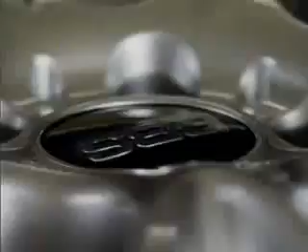They're like shining rings, sparkling jewels, the ultimate expression of an automobile. Emotions and passions focus on them. Their light alloy metal is seductive. Their gleaming brilliance radiates sheer power. Wheels are the finest feature of any car. BBS, driving in its finest form.

This expressive power has always been closely associated with motorsports. Look at a winning vehicle and you're looking at BBS wheels. All over the world, in different racing series and successful teams. Pole position in light alloy construction, world champions in series quality, world record holders in heavy-duty stability. It was the racing fever at the world's leading motorsports events that produced the BBS myth and developed the BBS brand.

BBS wheels are elegant. These giants of the sports world are naturally discreet. They don't need to prove a thing. It's this confident sense of style that car drivers and car makers appreciate in equal measure. Form following function, and lines based on mathematical curves that create the ideal line in every curve. Dynamism defines the appearance. That's the distinctive feature of BBS.

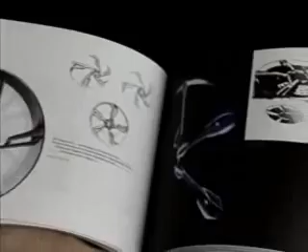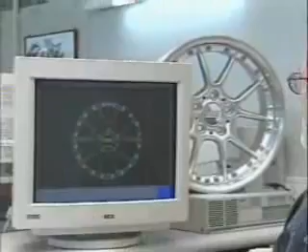Cooperation with highly regarded designers keeps the formal language fresh and satisfies customer-specific brand worlds. Within this creative network, maximum customer orientation and flexibility have proven themselves again and again. Development is teamwork on the customer's premises, ideally in a standardized software environment with problem-free interfaces for the transfer of data models and simulations. Achievements are passed on, results are maximized.

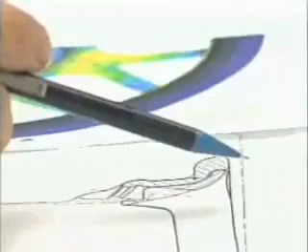At BBS, development primarily involves innovation, and that's why we don't need to keep on reinventing the wheel. Special development modules enable fast results within the cost targets. Simulations allow us to reduce the number of potential solutions down to a small number of finalists. But it's still the test benches that provide the ultimate results.

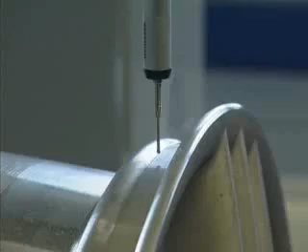BBS has a comprehensive testing area with all the testing equipment used to verify the usual standards and specifications. At the same time, our in-house requirements are far beyond those of the legislative and testing companies. After all, at BBS, every wheel has to be able to withstand the extreme conditions of motorsports.

Various factors have to be coordinated with one another, such as light alloy construction and stability, aerodynamics and brake cooling, or design parameters and production optimization. Add the highest processing safety and you have a high-grade quality product.

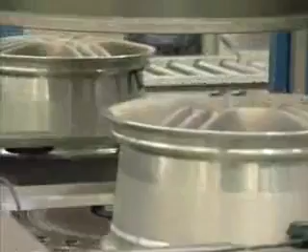BBS has several production plants worldwide, all working to the same high standards. All car manufacturer certification guidelines are fulfilled. Our ultra-modern process-oriented and self-organizing structures reflect the state-of-the-art in plant technology.

The hall layout enables different plant levels, tool changes without production interruptions, parallel production of large and small batches, and redundancies in process-critical applications. Reallocation of capacity on the fly takes place in all our production plants worldwide.

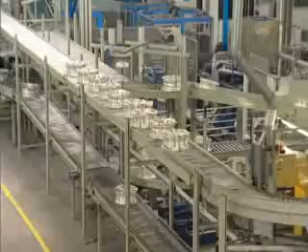The production process begins with fully automatic low-pressure casting machines. The alloys are standardized, but the decisive difference is made by the timing of the processing steps and also the details of our tool construction, like temperature control, for instance.

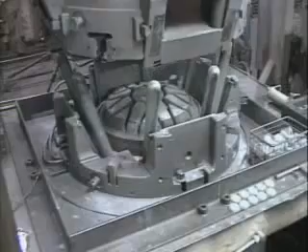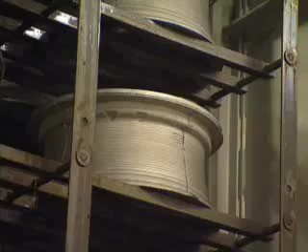During the several hours of heat treatment, the material properties of the future wheel are precisely adjusted. After the solution treatment furnace, the aluminum structure has the required structure and elasticity for operation.

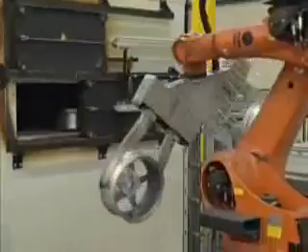In another furnace, the wheel is reheated to the ideal temperature of 300 to 350 degrees. Then it is mounted concentrically on a negative mold. In a uniaxial movement and under high contact pressure, a continually lubricated roller head creates a rotational profile. It's done on the principle of the potter's wheel.

The heated metal is simultaneously molded and compressed. This results in more stability, combined with less use of material and less overall weight. BBS is considered the pioneer of this process. It's known as flow forming.

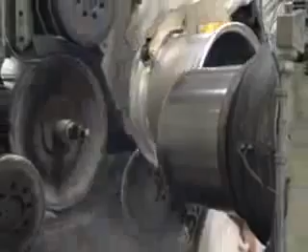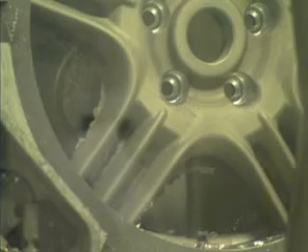After casting, the sprues and burrs are removed in a fully automatic CNC machining station. Bolt holes, the valve hole, and the center bore are also drilled. This is now done dry at BBS. Liquids, which are normally essential for cooling and lubrication during these machining processes, are not added. The overburden is fed straight back to the melting furnace.

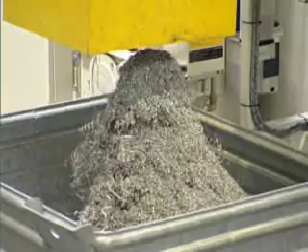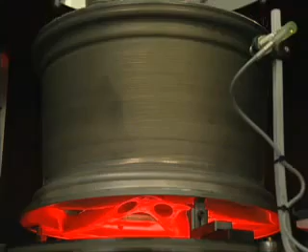BBS specializes in this dry machining process, which has won several awards. The entire station is hermetically sealed in order to prevent any emission of aluminum dust. Infrared sensors guarantee the precision of all contours. With special wheels, the deburring process is still done manually. Largely automated conveyor technology guarantees steady material flow between the machining stations.

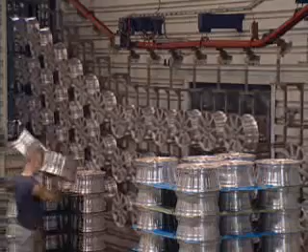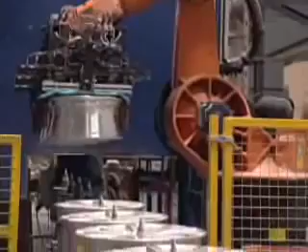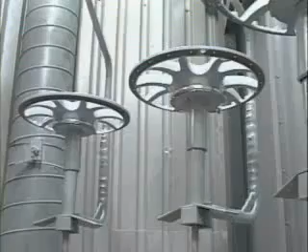With its chrome-free finishing process, BBS has introduced an innovation that has set new standards worldwide. This process has won us numerous prizes, including the Entrepreneur Award for medium-sized businesses. Melting the lacquer by means of powder coating leads to several advantages. The coating is thicker and, unlike horizontal coating, far more even at all locations in the wheel geometry.

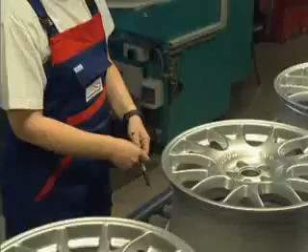The double-thick layer of varnish sharply improves scratch resistance and anti-corrosion properties. One reason why the use of BBS wheels in winter conditions is unrestricted.

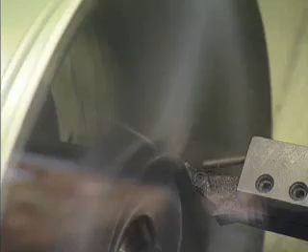Diamond-cut BBS wheels are especially popular. They owe their deep and brilliant luster to a special technique. After application of the coating, it and the aluminum surface are partially polished on automatic lathes using a diamond-tipped tool. This creates a highly attractive alternating pattern between polished and unpolished surfaces.

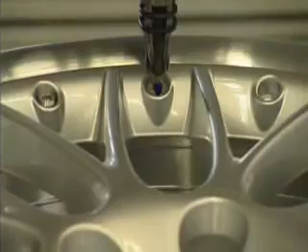High-quality modular wheels are an integral feature of the BBS brand. Forged spokes and flow-formed rims can, for instance, be combined to form an ultralight wheel. The sections are connected by titanium fasteners.

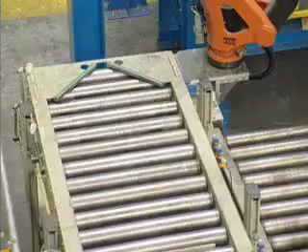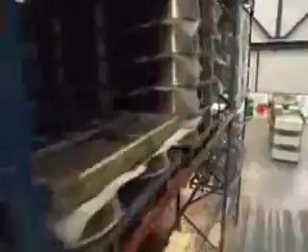OEM demands delivery to car makers, just in time and just in sequence. On the other hand, the aftermarket is characterized by seasonal cycles and fluctuations in demand. These extremely different requirements have to be satisfied by production and logistic planning, from mass production of millions of wheels to a single prototype wheel in motorsports.

With the GTI wheel of the VW Golf 5, an entirely new process of hollow space wheel construction has reached series production. The hollow outer shoulder is created via flow forming without the core being lost or enclosed, a world first in automotive engineering, a breakthrough in cost effectiveness. Hollow space wheel constructions can be made viable in the volume segment.

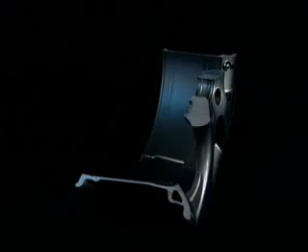The inner shoulder can be formed in just the same way, with considerable benefits with regard to costs, stability, and mass moment of inertia. Combined with the slide casting process for the spokes, complete wheels with airtight hollow spaces can be visualized in a self-contained production process. This is Air Inside technology from BBS.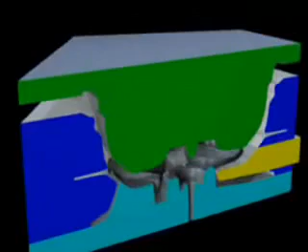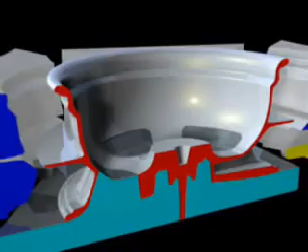Air Inside technology is a good way of demonstrating how the strengths of BBS work together. Restless pioneering spirit, operational excellence, complete command of processes, intensive cooperation with customers, and systematic market orientation all combine here to create a key technology in chassis construction. Less unsprung masses and improved temperature dissipation increase comfort, handling, and safety.

The airtight hollow spaces enable new approaches to tire pressure compensation while the vehicle is in motion and reduce tire damage risks. The achievable ratios between wheel load and wheel weight are exemplary. The wheel design also achieves an entirely new dimension of freedom.